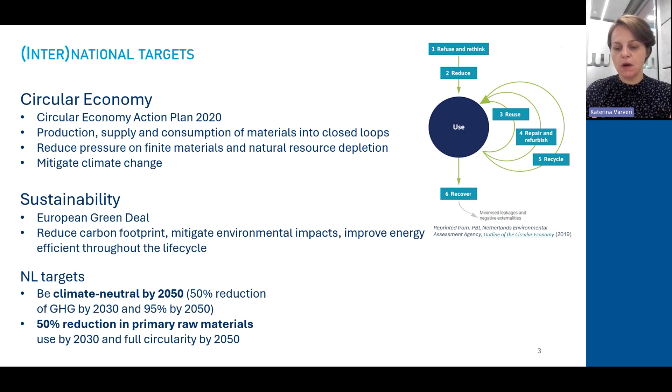And how does this translate in practice? What does it mean? In this case, for the Netherlands, already almost 1.5 or 2 years back, the asphalt sector actually announced that they will stop gradually. There will be, of course, a phasing out period, where the asphalt sector will stop with production of high temperature hot mix asphalt, as we know it. So we are going to go more on warm mix asphalt.

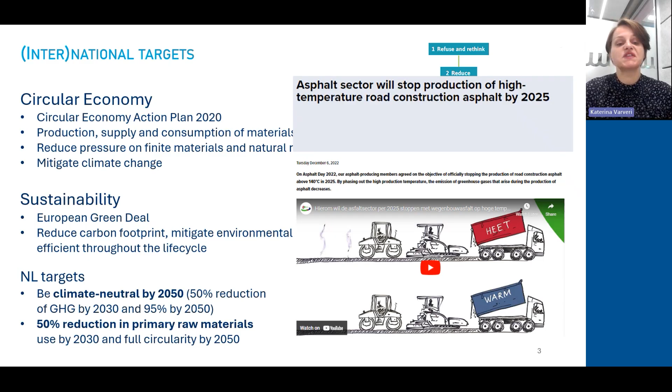At the same time, the ambition is actually to have a typical standard mix to be used in the highways that would be warm mix asphalt with 30% recycled material. So this is actually the ambition, and there will be a standard starting from 2025. There are, of course, specifications and other guidelines. They are already drafted. I think recently we had a final version of the warm mix asphalt guidelines from the Dutch organization, let's say. But this is something that we see happening, and has already started in the very recent time.

And then we do have more pressures. So changes in refinery processes. I'm sure many of you here, or all of you here, know firsthand about changes in processing crude oil. What does it mean? How do we get bitumen now for paving applications? The composition varies. We do have bitumen blends. We do have a lot of additives that are coming into the picture, from polymers, which is more typical, to

plastics, rubber, also a technology very developed throughout the years, epoxy modified bitumen, bio-based additives, warm mix additives in case you follow warm mix additives as your technology for lowering temperature, rejuvenators, another technology that is very much used in the Netherlands, not only to increase recycling rates, but also to extend lifetime. So we do have in situ rejuvenation. So there are all sorts of different chemicals and additives that are mixed together.

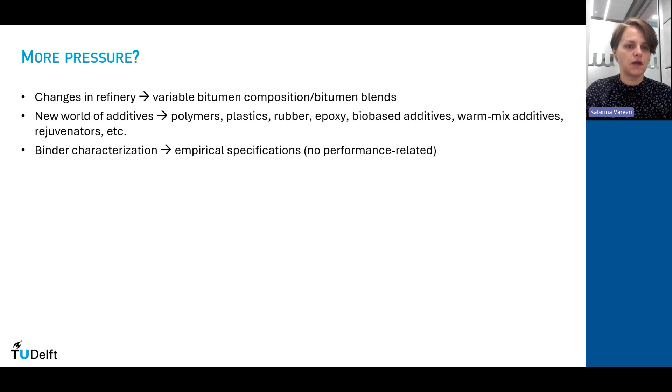And then there are other challenges if we go one level higher in terms of material scales. So now we are discussing mainly the bitumen level, or a bitumen-additive system. But of course, when we apply it on the road, this is part of the story, even though very important. There is a mineral phase, there are filler and aggregates, there are different interactions with respect to adhesion properties, for example, between the aggregates and the bitumen. There are structure-material-environment interactions.

I mentioned climate change. There are many different conditions changing, and changes in how our structure experiences environmental stressors. And of course, we see slowly that there is a bit more variability in performance, and durability slowly degrades. So everyone is kind of alarmed, and we put a lot of emphasis on how to address these two aspects, performance and durability, long-term performance, but also variability. So am I sure, if I use a bitumen, what would be my performance at the end on the road?

And here, if you see the second picture on the bottom right, it is actually a dike, because in the Netherlands, we also use asphalt for the dikes. It's a covering for dikes. So they are asphalt coverings, as they call them. So it's a very important part, and they face the same challenges as we do for the highway.

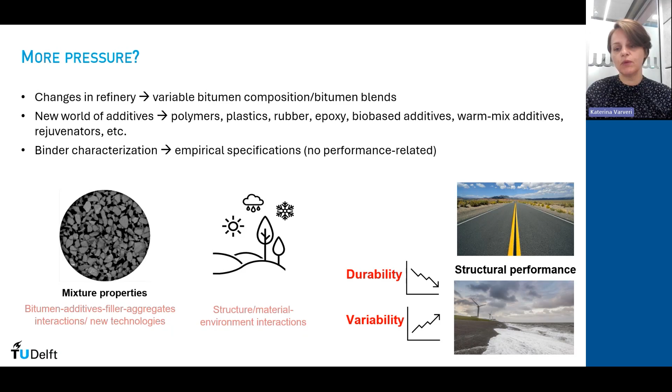So actually, I'm working on both topics, also for the dikes, because they need to renovate the dikes too, and we do have a lot in the Netherlands, but also on the highways.

So the challenges, if I'm going to summarize and also give a focus for today, would be how can we assess binders so as to make sure that they perform well in the long term and are durable enough, and how can we improve protocols, so tests, in order to better simulate field degradation, considering all this fundamental knowledge that we are developing as researchers, but also field data, so experiences as they come from practice.

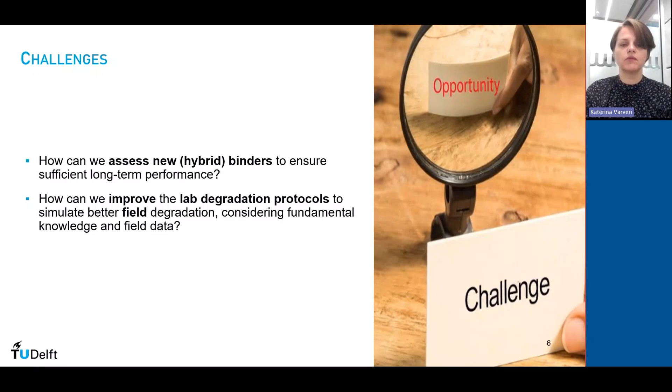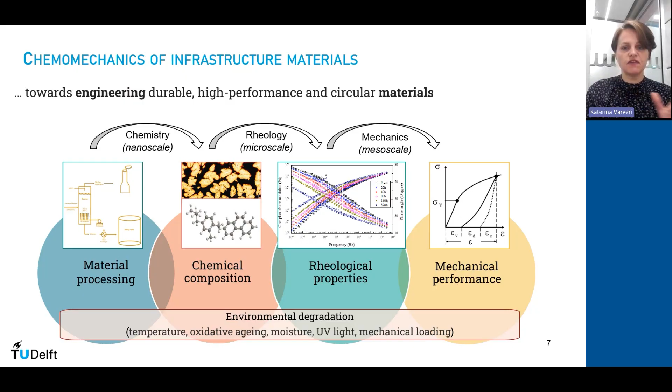My group is called Chemomechanics of Infrastructure Materials, and we are working to make these links, to link the material scale to performance at mixture and pavement scale under the influence of different environmental factors. So you can imagine that there is a variety of techniques and methods that we use for this. Today, I'm going to focus more on the two middle parts as you see them here: chemical composition and rheology.

So I'm not going to question how this chemical composition was achieved, what were the material processes or, for example, refinery processes that brought my material to this composition, and also not really link it to mixtures, but I will stay within the chemistry–rheology link.

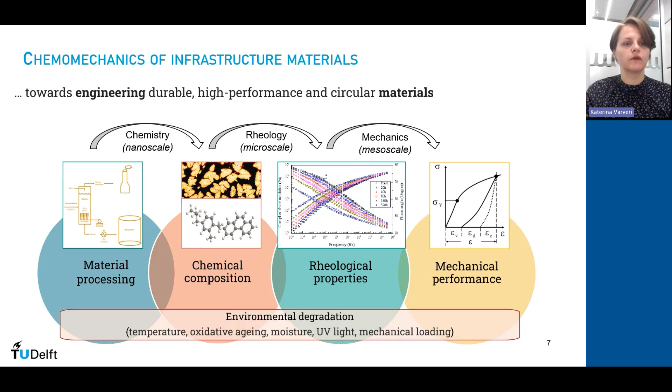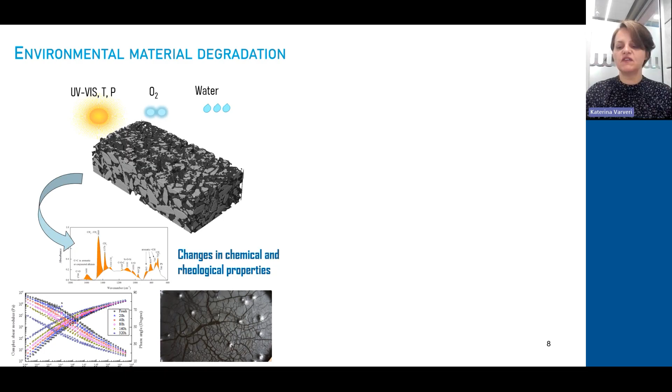So we were talking about environmental material degradation. We know that different environmental factors affect the performance of bitumen. We call it aging, even though aging usually refers to oxidative aging. But when I use the term aging, it's more about environmental aging. So it's everything that can influence and change the properties of my material, which in turn will affect the properties of my pavements.

And there are different ways for this degradation to manifest at pavement level. The main aspects are fatigue cracking, low temperature cracking, and raveling. For the Netherlands, again, I underline this, we use porous asphalt mixtures for our highways, so rutting is not a very big problem. However, in provincial roads where they use denser mixtures, this also comes into the picture.

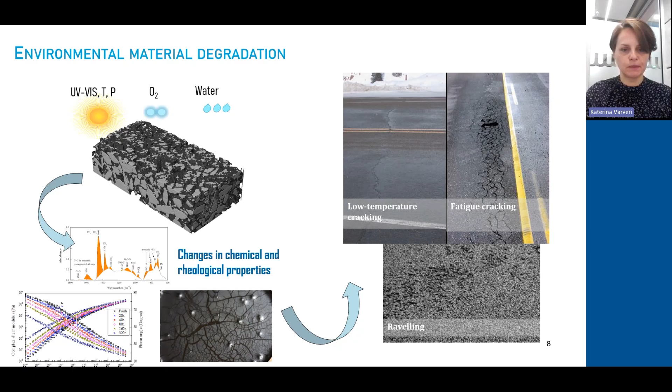So this could already be one reason for the differences we see between lab and field results. Not the only one, but with respect to durability and aging, how to simulate environmental aging, we feel this is an important aspect. So what we aim to do, and what you will see a bit later, is to understand how the individual and combined effects of aging affect bitumen performance, and which are the critical factors to integrate into future degradation protocols.

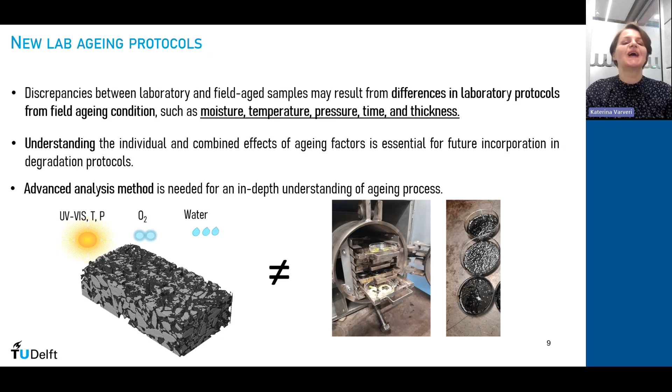And we use advanced analysis methods. I will show some examples, in order to make the most out of the data, to maximize the amount of information that we are able to get from standard or semi-standard tests, I will explain what I mean, tests that are typically used in research, but also in practice, to characterize bitumen properties.

So to focus a bit more, we were thinking, okay, how can we improve laboratory aging procedures? What would be the main factors to include? This project specifically comes as a request from our Ministry of infrastructure, Rijkswaterstaat in the Netherlands, where they want to include new testing methods or improve current testing methods in their so-called blueprints for material characterization.

So we started, of course, with laboratory experiments. We tested many bitumens in different conditions. I will present to you the two main characterization methods, but we used many more methods. These are Fourier transform infrared spectroscopy and DSR. So these are the two that we used.

And then we use different analysis methods, as I said, to maximize the information that we get out of these tests. And finally, we wanted to validate, compare, and check how all of these laboratory experiments and methods really relate or compare with respect to field-aged samples. So we have also been monitoring specific test sections. It's not a test section per se, but a slab. So we made some test sections that we have been following in the last 10 years in order to be able to understand and make these connections.

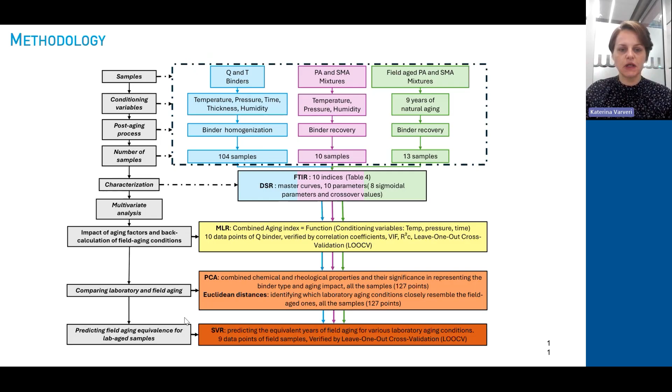So this is a big testing plan, or material testing matrix, showing the different conditions. We tried to develop a protocol that could incorporate different factors, but of course in the lab we want to have accelerated phenomena. Therefore, we also varied thicknesses. What is the thickness of the bitumen? Standard thickness for PAV, for example, is 3.2 millimeters. So we try to reduce the thickness in order to accelerate phenomena, but also play a bit with the temperature, pressure, etc.

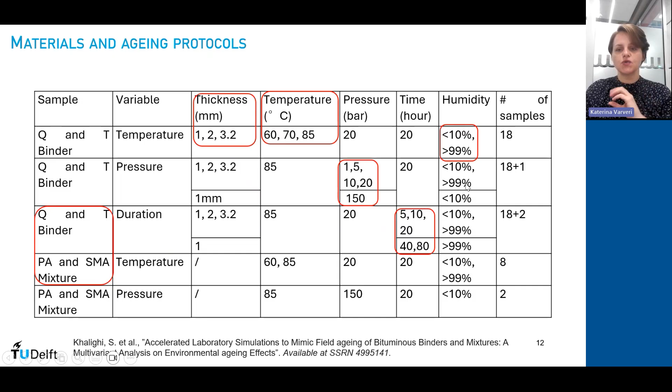And then we take the cores. We are also interested in seeing, especially for porous asphalt, the effect of aging in the depth of the surface layer. Therefore, we cut the sample into 3 slices. Every time, we first test the core for stiffness and strength, then we further slice, and later we extract the bitumen and test it. We have been doing this exercise for 10 years already, and looking at the material we have, I think we can go another 3 to 5 years, depending on the type of tests we would like to do.

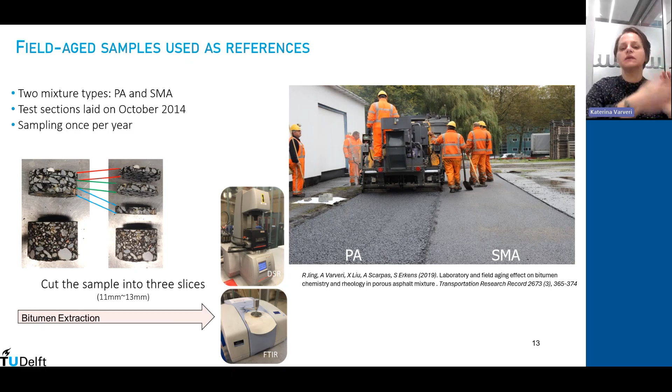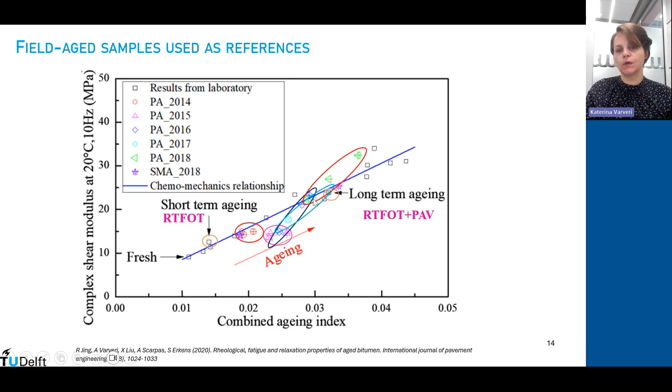In each bigger circle, you see 3 points, which are the top, middle, and bottom slices of the top surface layer. So you can see, as we started in 2014, the properties among these slices were very close to each other, but as the years go by, there is really a gradient happening in your pavement with time, with the top slice of your surface layer being more aged than the bottom part of your surface layer.

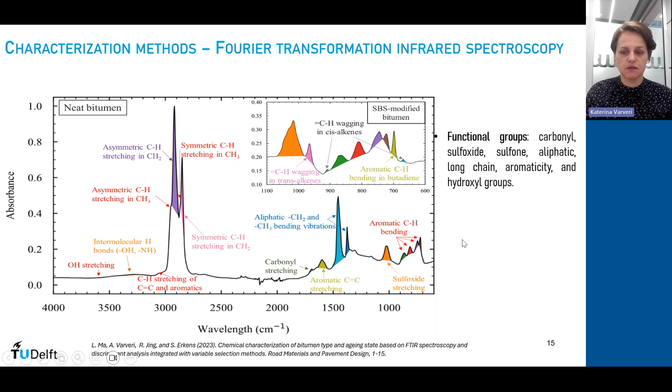So we have all these materials, as we said, we collect all this data, and what we do is FTIR. So this is the main method that we use. And for this study, we use specific functional groups. This is the carbonyl, sulfoxide, sulfones, aliphatic, long-chain, aromaticity, and hydroxyl groups. These are the groups, the indices considered in the study, in the results you are going to see later.

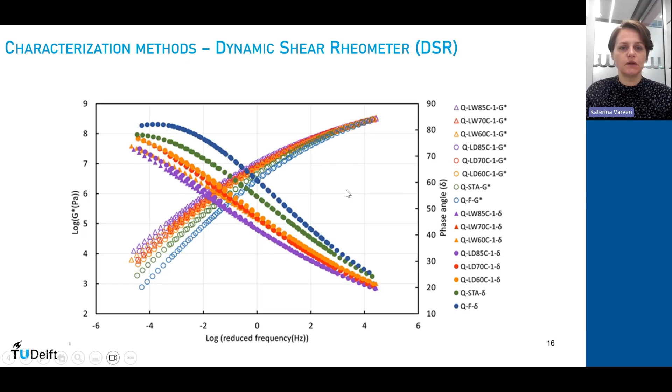And what do we take from this? We take, as we said, these functional groups. This is how we define them. The indices, and then we use the sigmoidal model, where we have different parameters in order to model the behavior and the master curve, as you saw in the previous slide.

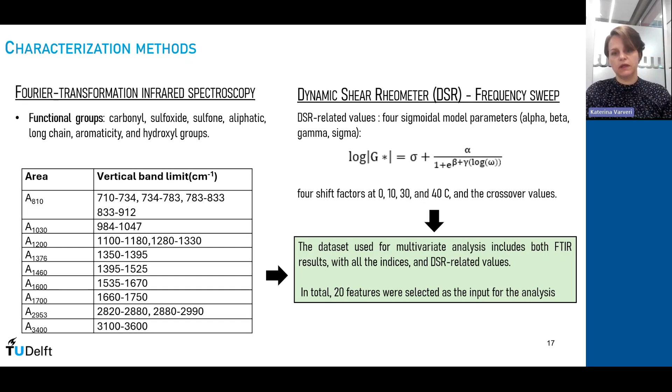So the data sets that we use consist of all these parameters that give us the main chemical information as they come from FTIR spectroscopy, and we use the sigmoidal model parameters with the shift factors for different temperatures and the crossover values of the rheological data. So all of these are collected for each bitumen that we use and for each condition that we have. So you can imagine that there is quite some data there, and we combine it together.

So we have a combined aging index, which is a way to express all these indices in one single value. I will not go into the details of how it is done, but we do have publications about it, so I can share them with you later if you would like. And of course, the rheological data set, which is, as we said, the sigmoidal parameters, crossover values, and the shift factors from this data.

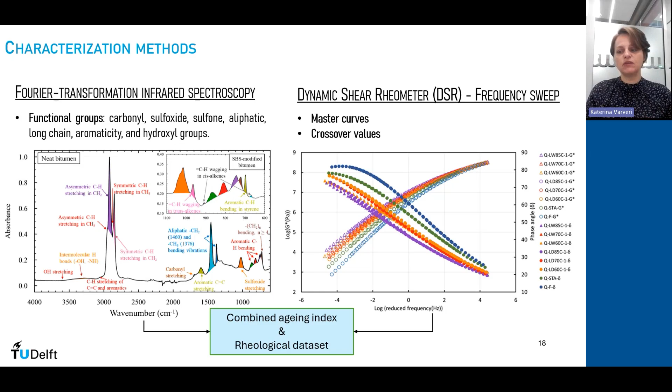So previously, what we would do, we would look at the different parameters, like with aging carbonyls increase or sulfoxides increase. At some point, we see a plateau with time, etc. Or the master curve, G goes up, phase angle goes down. And these are the usual evaluations that we did with respect to understanding how bitumen is affected by aging.

However, we feel that this is not enough at the moment. The complexity of the materials that we have creates the need to go further. So we use different statistical tools. I'm not going to go into big detail, but we use principal component analysis and linear discriminant analysis. All these methods are under multivariate statistics, used to analyze and find patterns in relationships between multiple variables. And in this case, we do have multiple variables, as we already saw.

So how do we use it? If you run such analysis with the data that we have there, then you can get this type of information. So for example, here you see different bitumen types. 460 is for 40/60, of course, 710 is 70/100. PMB is the SBS modified bitumen in this case. And there are three different bitumen types, Q, V, and T. These are the names that we give them.

And you can see already that we can have a very good classification based on the type of bitumen. So, for example, you can see here that you have the two bitumens, three actually, together. These are the T bitumens. And there is a slight shift based on the grade of bitumen. Here you see the blob of the Q bitumen on that side with V. And we do have, of course, some differences.

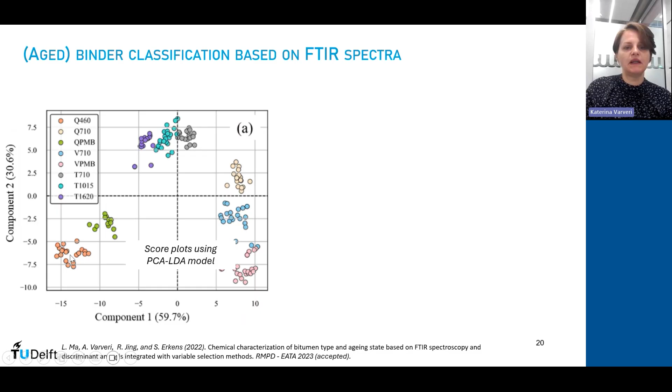For example, we would expect that the Q bitumen would cluster more with its own family, but this was not the case. And of course, we don't know the exact composition with respect to what processes this material went through. But apparently, there is something that creates this classification.

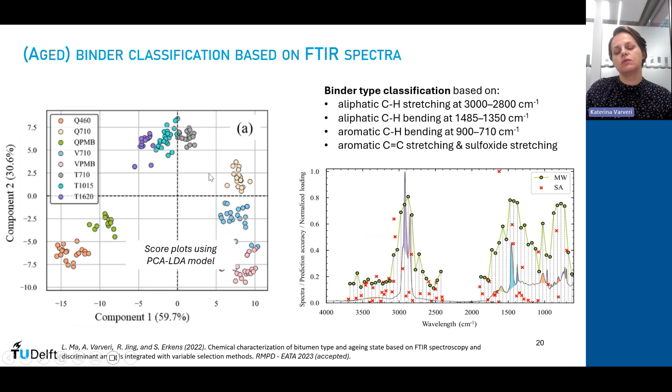What we can learn from this, though, is that these algorithms can tell us what were the discriminating factors and the discriminating information used to make this classification. So from this, we can also understand what are the more influential indices or factors that we can check in order to evaluate differences between different binders. And this is actually one of the strengths of these tools as well.

So you can imagine that this could be quite interesting if you have a bitumen with unknown, let's say, origins or state of aging, or you get a field bitumen, and then you have such a map where you can position your bitumen in the right place. Then it gives you already quite some information where you are with respect to service lifetime and durability, as we were talking about earlier.

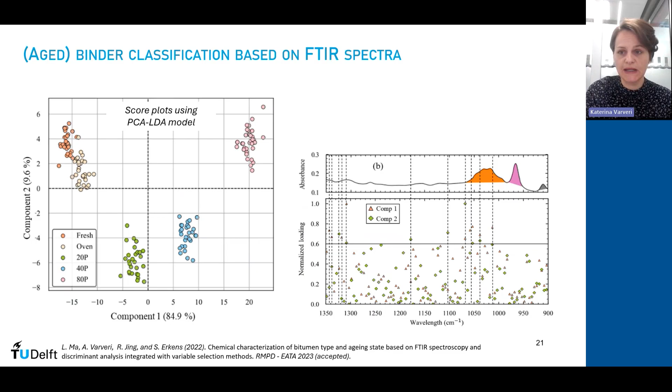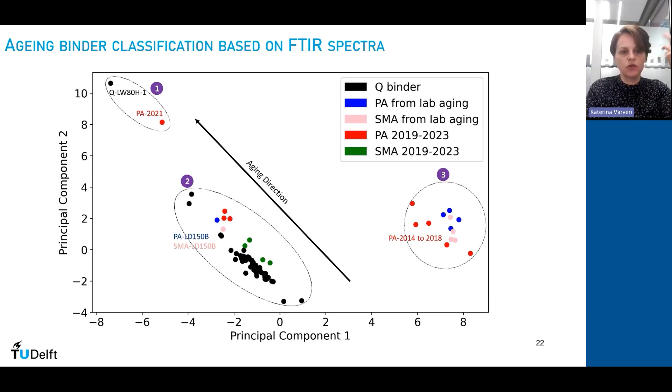Why is this important? Because we can use this information also to tailor our laboratory protocols in order to come closer to actual field conditions. So this information is already important for us.

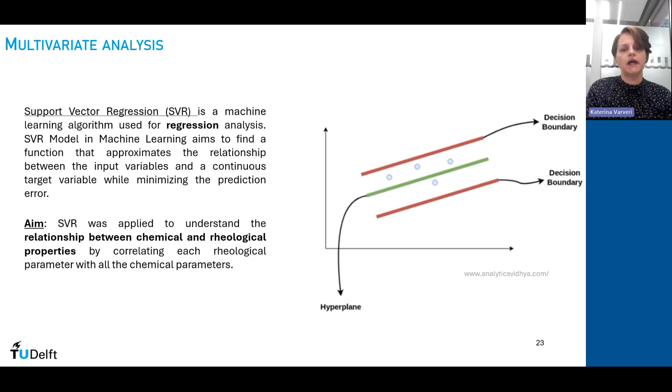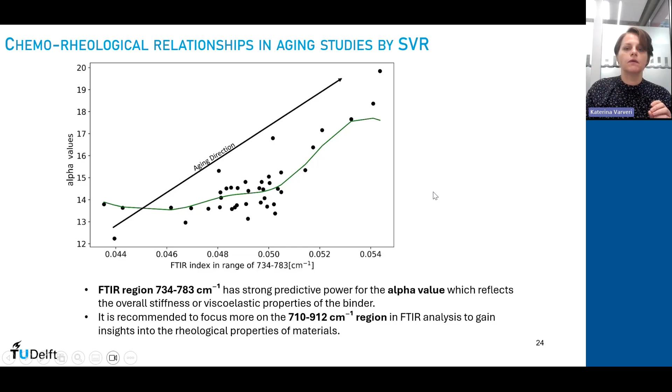And how do we use it? We use different techniques, but the final outcome is that we go towards predictive models. In this case, we were able to say that if you take your material and age it in these conditions, then you simulate so many years of field aging of porous asphalt mixtures. Of course this is based on a specific data set, so now we are trying to extend it, but these tools can help us make these relations between field and lab aging.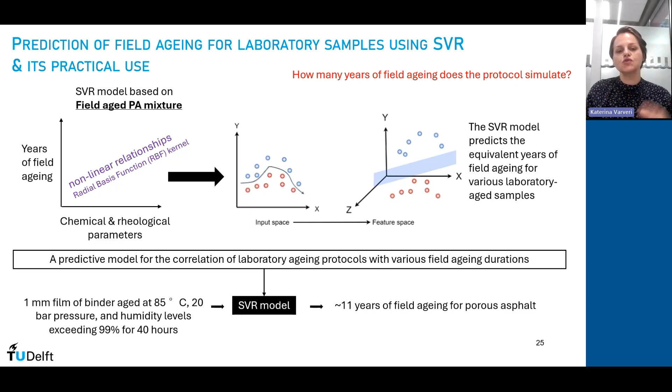Of course, you can also take a big hammer and start hitting your material. You will also create some damage, but here the objective is that the chemical and rheological profiles of field and lab match each other.

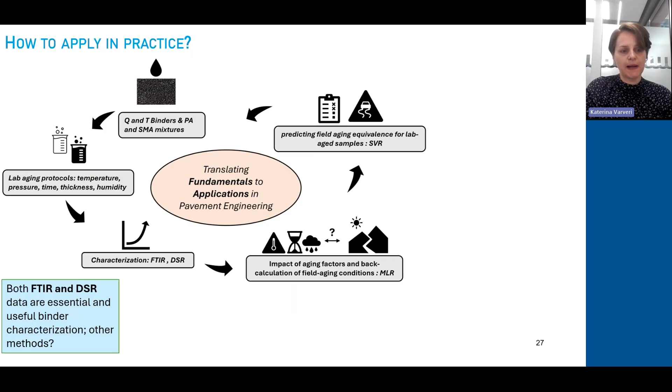So how to apply this in practice? We use FTIR and DSR for binder characterization, so we can get more information and understand the actual relation between chemical properties and performance properties like rheology. And we can use such models to classify binders, which is important because we can identify where in this map of different bitumen types an unknown bitumen can fall. And machine learning can help us with prediction of properties and conditions, and really bring lab aging protocols closer to field aging.

Of course, all of these are good. They do require data. So we are lucky that we have quite a lot of data already. Our PhDs or the researchers here work with different data sets. So we try to update the databases and rerun the models, train the models, especially the machine learning models. They need a lot of information to become more and more accurate and reliable.

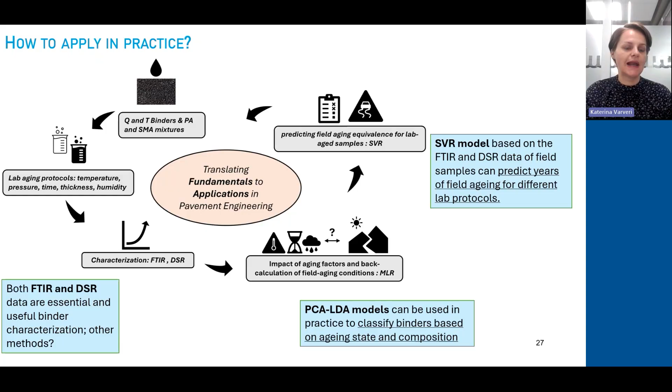But of course, there is always a challenge, a big challenge, and I'm slightly over time, I think. I will just close with uncertainties. Uncertainty is a big issue. All these techniques, as I said, they need data, and of course, they have some margin of error, as any prediction or any model, actually. So what we want to also do is to really quantify uncertainty and put it into the output, into the answer, into the prediction.

And how can we do this? This is an example where we use another machine learning tool. And in this case, we don't use FTIR, but SARA fractions and some physical properties, in order to predict from this input data the master curve for our bitumen.

So the input data, imagine it can be experimental databases, with all these conditions that we have. We can test for this, we can specify the conditions, but also some of these come from other models, which are finite element models, validated, of course, with tests, and then we run them many times in order to increase the amount of input that is needed for such a machine learning method.

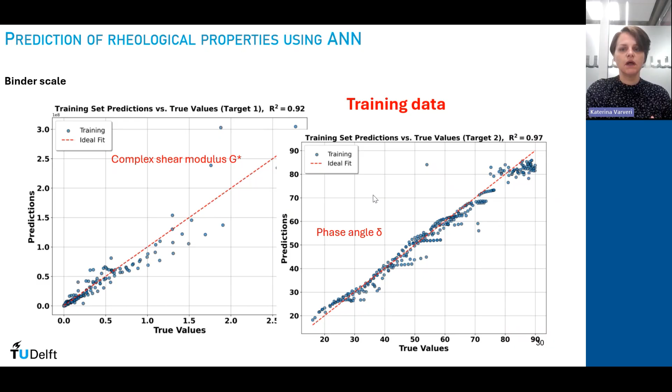But of course, you train your model, and there is an ideal fit, and here you have a very good prediction with 0.92 and 0.97, but here you are in the training phase, so you feed data to your model in order for it to learn. You train it, and then you also need to test it, and naturally your accuracy goes a bit down. Before it was 92 and 97 for the complex shear modulus and phase angle, but when you use your testing data, so you test what it learned, the prediction is a bit lower.

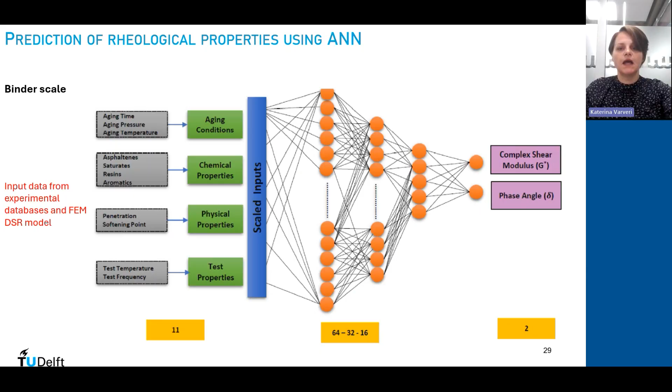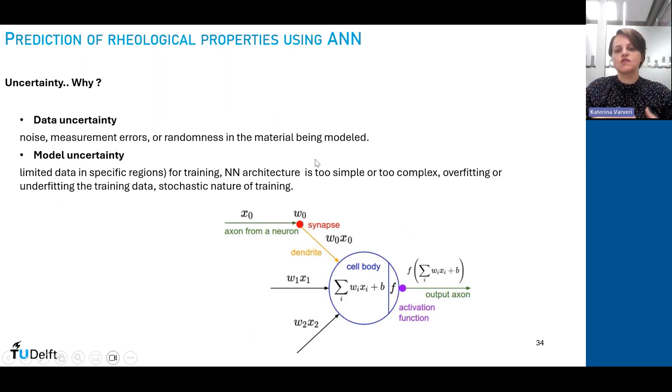So they can have variability and uncertainty, which is related to the data on its own. There are data sets that are noisy, there are errors, measurement errors. There is also randomness; these are not deterministic models. There is also model uncertainty on its own, because the architecture, as they call it, so how many nodes and layers you take, makes a difference in the outcome of your prediction. And all of this creates some uncertainty.

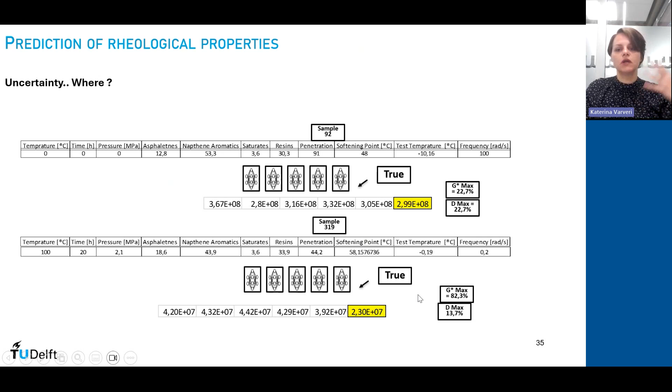And for me, what does uncertainty mean? If I run it one time, it can give me a G star of 2.99 times 10 to the power 8, and the other time it can give me 2.3. You cannot say it is wrong, but it is different. Usually we aim to get one answer, but this is not the idea, because in my opinion we need to consider this uncertainty, have a typical range of values, quantify this uncertainty and use this information to take risk into account and make informed decisions.

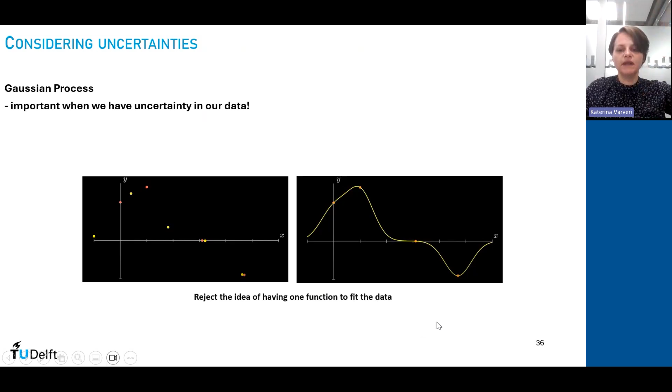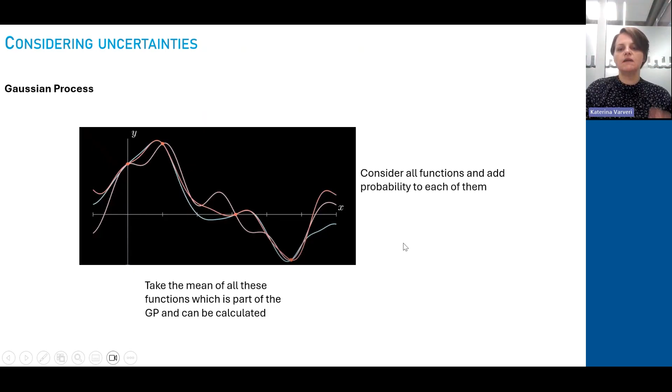So in this approach, we reject the idea that only one function can describe, for example, a master curve in this case, the points that are given in these big data sets, but there are all sorts of possibilities, with a specific probability for each, on how to simulate, model and fit these data points, which creates a prediction with uncertainty quantification.

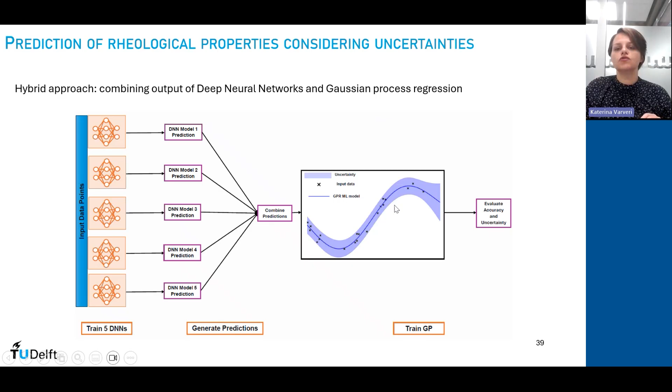And this is actually what we are working on. So my PhD Mahmoud is working on a combination using machine learning with a quantification of uncertainty, in this case using Gaussian regression, but this is too detailed, in order to get outputs that give you also the uncertainty of the data, the uncertainty of the answer that you get.

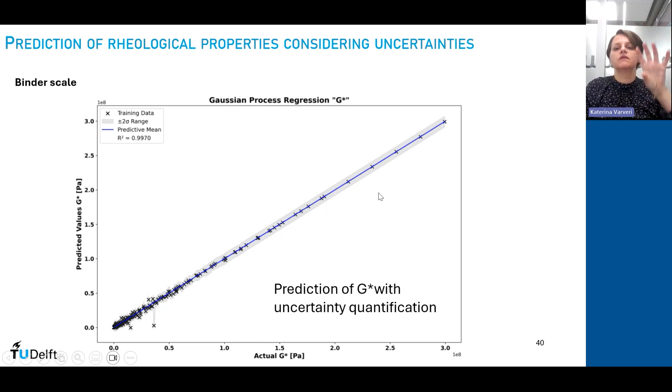In these cases, we again predicted G star, so complex shear modulus, and you can see the gray area around it is a plus minus 2 standard deviation range. So we give you an answer. If someone asks me, can you predict based on these SARA fractions and conditions the G star, for example, I could say yes, it would be, for example, 2 plus minus 1. So you already have a range, so you know that you could have a value within this gray box here.

Similarly, the same for delta. You can see the challenge of modeling delta, actually, phase angle. So the gray area, let's say, becomes bigger. And because we didn't have a lot of data at very low temperatures, you can see that the uncertainty here goes very high. But now we do have the power to understand how certain or not is the number that we are going to get. And I feel that it's a strength if you have to make decisions, if you have to make some, let's say, selections or compare or evaluate specific materials.

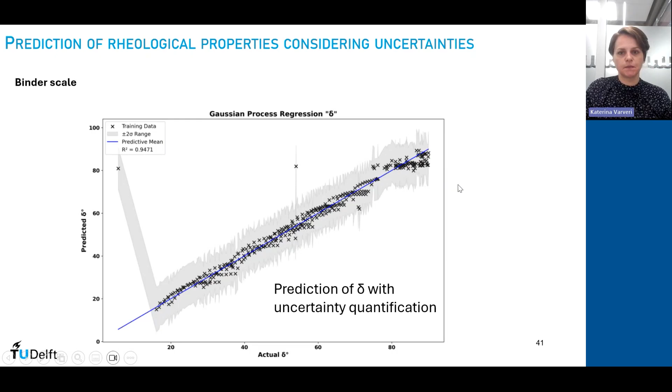So ambitions and steps forward. We are using all these tools that are heavy on the science of it in terms of methods and analysis. However, our aims are quite practical. So it is to develop protocols. Part of the project that we are working on with the ministry, we are now going to propose a protocol to be used that we are validating with more and more materials as we go.

Another is that we can use such tools for fingerprinting binders, so for identifying what their state is in terms of composition and aging. There is already a RILEM technical committee on fingerprinting of bituminous binders, where Professor Hofko from TU Vienna is the chair and I am the co-chair, where we aim to have a pre-standardization of FTIR as a recommendation, as an output of this committee, on both aspects, so how to perform the test, but also how to analyze the data. My group is specifically focusing on the tools for the analysis of spectroscopic data.

We do test and we do get information on other technologies. In this case, in the Netherlands, in situ rejuvenation is very relevant. So this is what we are working on. We want to predict performance level, and we want to validate our tools for more and more materials and technologies. There is a variety in materials and technologies, as we said. So our aim now is to see if these relations work also for mixtures like low temperature mixtures, for example, with high percentages of recycling. And can we identify groups of additives that have a kind of anti-aging potential?

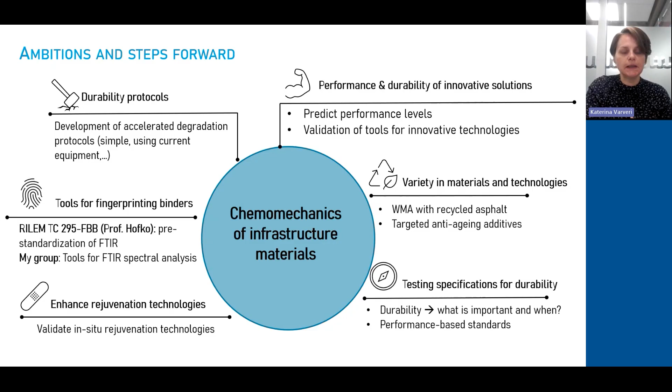And finally, the acknowledgements. For all of this work we need people and we need resources, so we need budget and money. This work is mainly part of MAFRIN, which is a multi-scale approach towards future road infrastructure, funded by our national Dutch Research Council. Then we have Rijkswaterstaat, which funded 4 years, and now we are happy to start another 4-year program as a follow-up on knowledge pavement engineering. My work will focus on durability of new materials, or new with respect to more intensive use in the Netherlands. And of course, we have CERCOM, financed by CEDR, which is touching upon the environmental circularity aspects. I didn't go into this because of time.

I'm already a bit over time, but this is the holistic framework that we were talking about earlier.